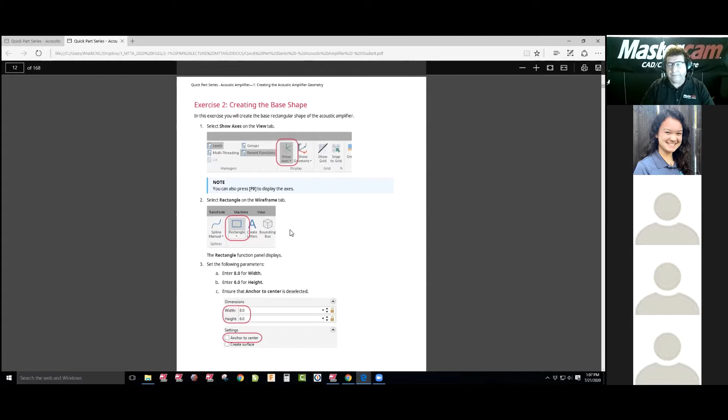Mark, hit the plus sign and increase the width of your document on your screen. Keep going, keep going. Yeah, for old guys like us. I hear you, you're just well ripened. Okay, thanks Mark, good job. Anytime, Brad. I need the feedback because I've been changing things back and forth at night when I've been looking at this.

So it's going to go ahead and show your axes and how to create a rectangle, and that's what you start with. It's an 8x6 rectangle as you start this drawing. As you can see, I have it here. So let me start a new drawing. Say no to that, don't need to save that.

And it goes into the wireframe. Again, Mastercam is teaching you to go through this whole process step by step, all the way. This is not an open file, it's create. You can create it for your students, and you can have them do the toolpath.

So we're going to go into wireframe, the wireframe tab, and choose rectangle, and we're going to set our information here. Now, real important to cover this: their anchor center — they don't want you to have an anchor center, they want you to put it in quadrant 1.

As you can see, the axes are already shown, and what they were saying in the video is that you can turn them on and off from this button here, or the hotkey, which is F9, is another one. So we're going to go to rectangle, and we're going to turn off anchor to center.

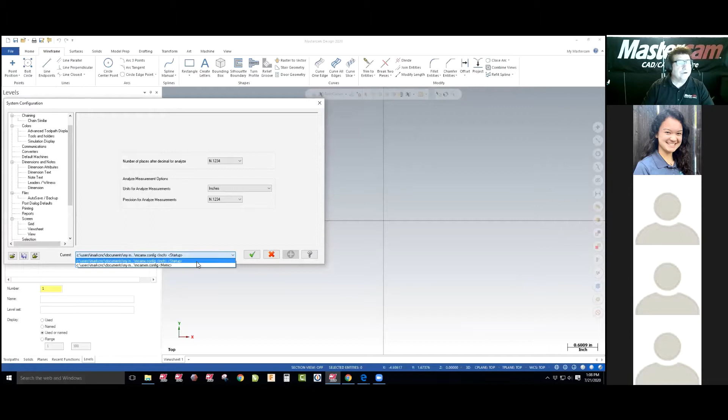And it looks like I might be still in metric. Let me go to configuration. Am I in metric? What am I in? No, I'm in standard. Okay, it just remembers the last thing I had in there — I wanted to make sure. So back, and then we'll go back to rectangles.

And then we're going to go ahead and lock these two. The width was — let's take a look — 8, and the height would be 6. So 8, tab, 6, and you can see that — oops, hit a wrong button there. 6, there we go, and I can lock it in at the origin. That's what they want us to do.

Again, from the video before, you learned to fit the screens. We have this done here. We'll go back to the video, back to the documentation — we'll fit to screen, go to isometric. So again, you can go fit to screen, isometric. Let me get this out of the way here. There we go, and we have the part here.

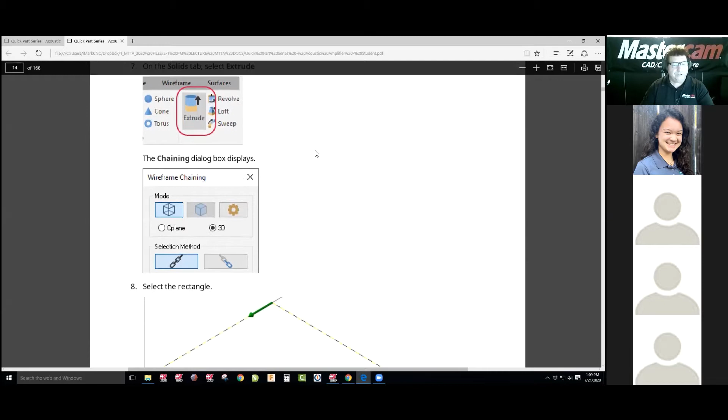Go down further, they're going to ask us to work with extrusion. So immediately you're working with 2D geometry, and now you're going to make a feature of it, and you're going to make a solid body of it. Just like any other CAD system, we create — this is not a dimension-driven program, but it's very easy to put the right dimensions in. I wish we could, but we can modify and change things by scale or changing the value of its entity.

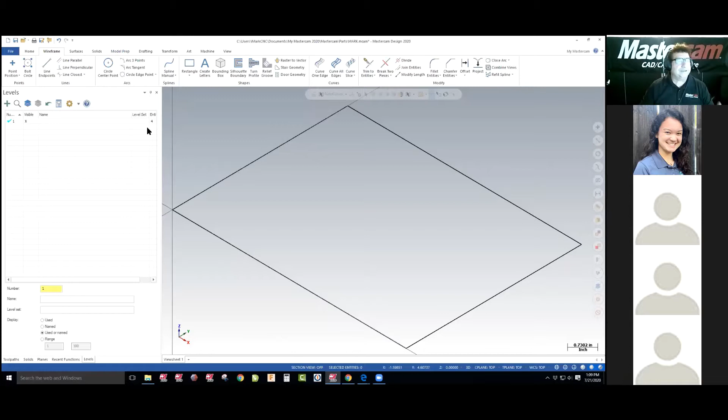So when people say Mastercam isn't parametric, well, parametric is a history. There's a little bit of history in what we have here, but it's not like it is normally when you see it on parametric software.

Okay, so we have it extruded. It's going to tell us to select the geometry, extrude a body. We're creating a body at 1.25 inches, and the direction they want us to go is up. So we're going to see the direction going the wrong way. We can also drag and move this around any way we want. We can get off there, we can reverse the direction, and we can put a value in here too as well.

Let's double check. It says 1.25 inches. I'm correct, 1.25 inches, everything's good. And now we have that information.

Now their image is solid. I can turn on translucence, if you were in my first one you would have seen that. We can put on edge curves, so the edges show, or turn those off and it's just smooth. I like to see it with edge curves, it gives me a lot of information I need, so I'll keep it solid for right now.

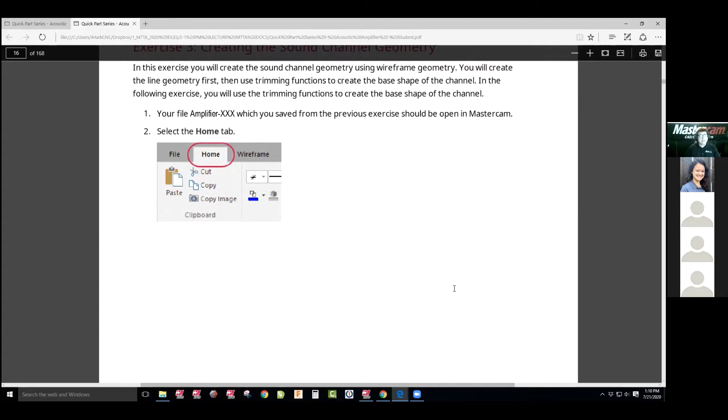Going back to the PDF, we're going to start creating some lines. This kind of made me laugh because I used to teach this way a long time ago and got out of it since I use offset so much. But there are things you'll learn in the future using this - creating a line command, doing a vertical, and placing it on the axis. So they're just drawing it anywhere here, and you can place it on the axis where you want, and that's what they're teaching you.

So in other words, they're asking you to just create a line, two points, and put an offset on the x-axis we're using, and watch it move.

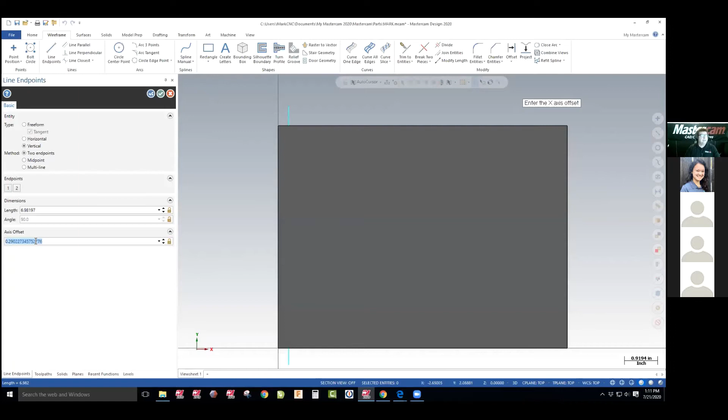Oh, I forgot one thing - you better make sure you read the information, because they want your Z above that, and they want to change your Z, your 2D - I can see it behind there. Right mouse button click, make this 2D, and we want to draw everything at the top of this plane. So they're asking us to change the Z value to 1.25, or 26 I think it was, or 25 I believe, yeah, because that's what I did.

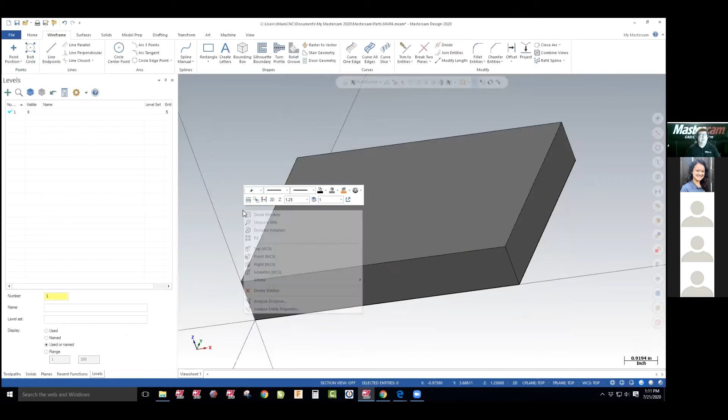Let me double check, it'll pick it up automatically. Yeah, 1.25. Okay, let me double check, see if that's what they want - 1.25, perfect, okay, everything's good there.

Let me see what else - where was... okay, now we can do the line. Back to the line, we're going to do a vertical line, any two points here, and we can place it on the axis at 1 inch. That's one way of doing stuff, I don't have a problem with that, it was kind of neat that they showed that.

Also, just to give you a hint, you can use offset at a distance of 1 inch, grab an edge that's not created, and it'll create it off that edge automatically. So they're using some techniques I used to use a long time ago that I don't use anymore, and these are just fun things you can learn.

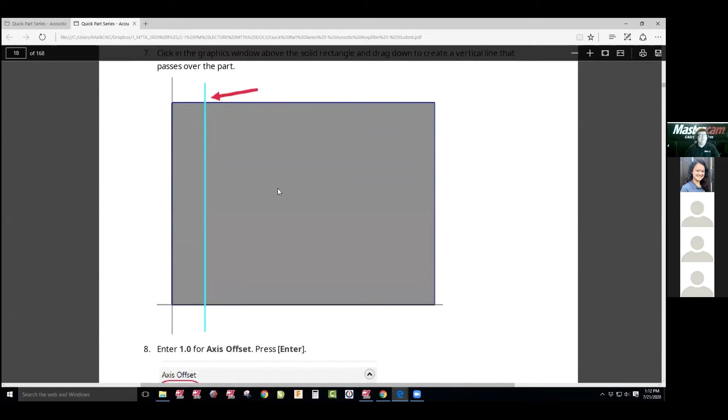So they want you to offset the next one at 3.25. Let's do another one - in other words, draw a line, not offset. They're actually just doing a vertical line anywhere you want. I can do it way out here and put in that 3.25, and it'll move it in the positive quadrant. Apply that, we'll go back here and go down.

And the next one, I think it's 4 - what is it, did they give it to me? Oh, they want to do horizontal. Let me see, I missed that one. So that one's vertical - now we change it so this distance was 1 inch from there.

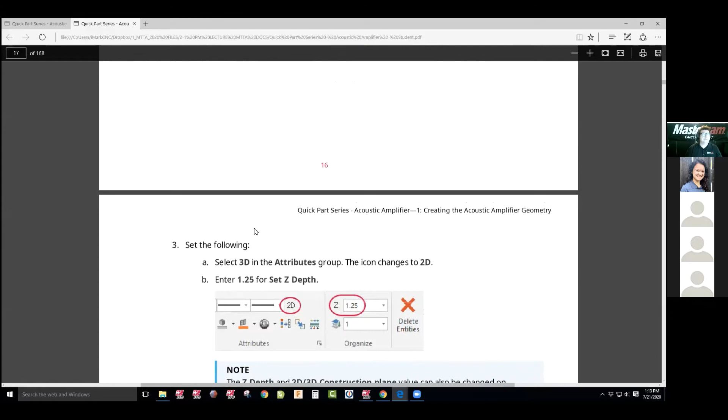I lost the distance for that vertical right there. I know it's there, okay, sorry about this - okay, here's 1 inch. The first offset is this one. This... oh there it is, right, 3 inches, so from the axis - so this one's wrong, I missed that one there.

So an easy way to fix that was just to know the dimension number. From the edge, we got that there. I'll get rid of this one here.

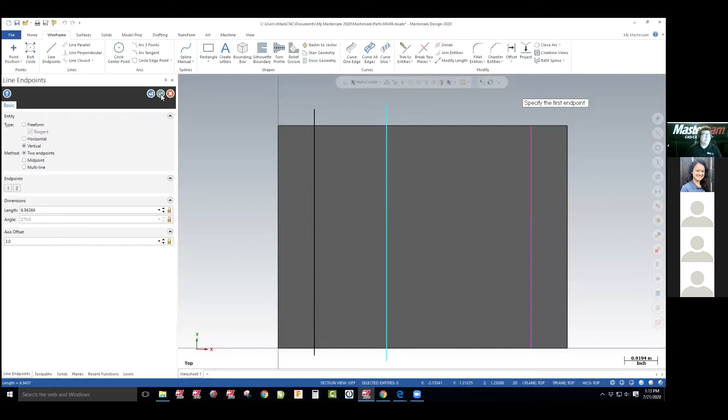And now we want to do the same thing, but with a horizontal line going across anywhere I put it. And the value of that horizontal is going to be 3.25. There's where that one is - 3.25, there's the first line.

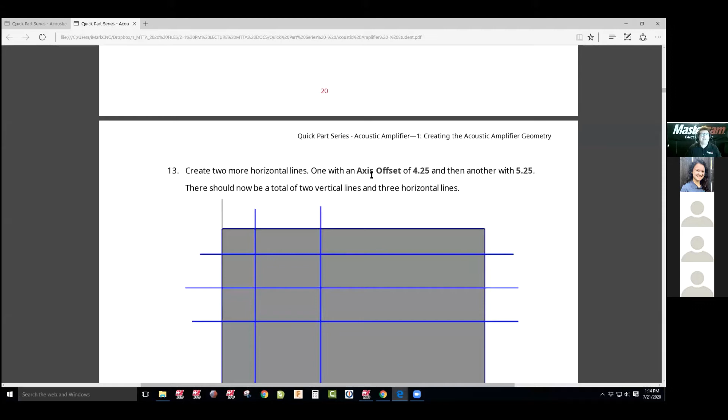Draw another one - the next line is going to be offset to, does it say - I better not go so fast - 4.25 and 5. Okay, so it's 4.25 and 5.25 in the document. So they didn't have the dialog boxes, they just have it in a sentence here, so you'll start reading these.

So if you take a look at that image there, it looks like the image I have, except there's a blue line, and I can change these to blue anytime I want. I'm used to drawing in black, so let me change that just to make it user-friendly for everybody. I don't know if that makes it better to see.

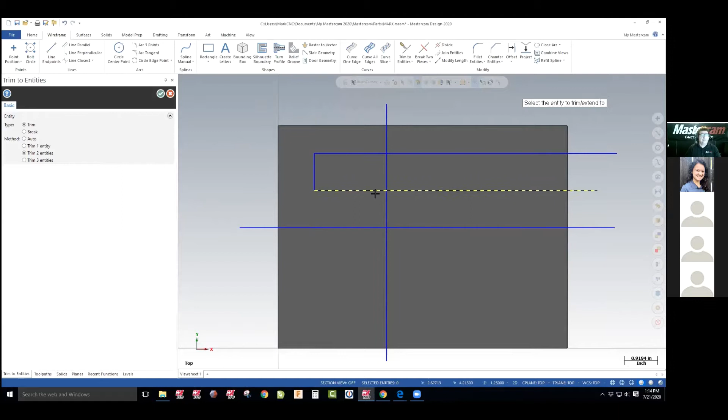And then we would do some trimming. They're taking you through trimming to clean up those entities, and we're going to use 2 entities. We have to create this. This right here was a little confusing for me, but I did trim, and I actually took this. I'm going to move it over here so I can get the images. It wants me to keep 2 entities - this one and this one, this one and this one, this one and this one, this one and this one. And we bring this back over here. That's the wrong one.

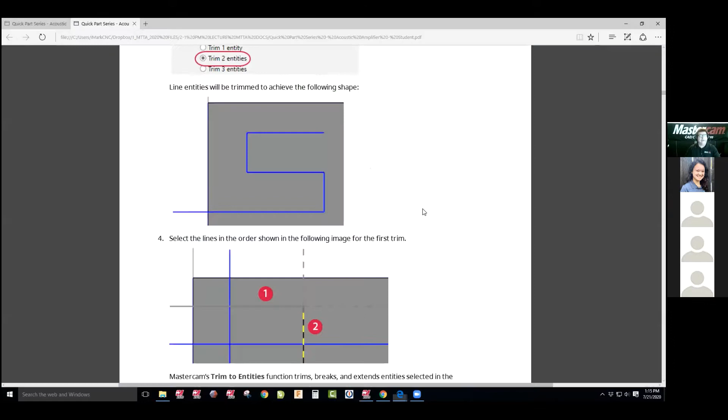Well, you can see it. I pretty much have that on my image here with that long line there. I'm not worried about that long line, and I trimmed it up. It walks you through cleaning those 2 images up. I got one more to do. It looks like I got to trim that back, so I'm going to trim this to 1. I'm going to take this and trim it back to here. Now it looks like I can actually trim this to here if I really wanted to. I guess that's what, no, they didn't do that.

But it doesn't matter. Now they want us to put circles in there because the sound has to flow smoothly. So I'm going to unlock my radius and diameter, grab the midpoint, and snap to there, then snap to there. It automatically gives me a 1 inch diameter with a 0.5 inch radius. From that point, they just taught us to do a circle, line, trim.

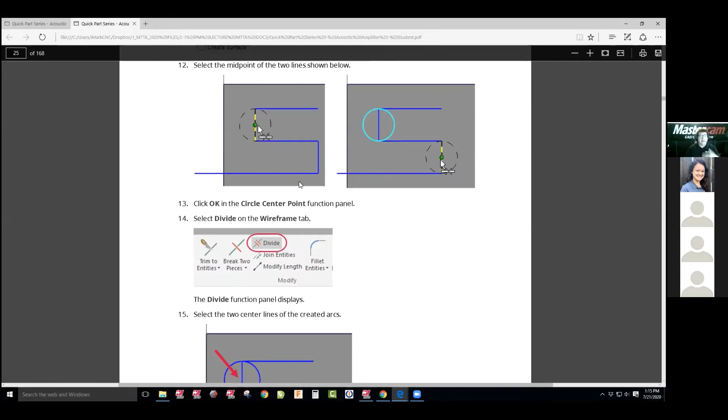And now we're going to go here and do a divide to get rid of that information so it looks smooth going around. So I'm going to go here to divide. I'll choose this to divide that, divide that, divide that, and divide that. Now I pretty much have exactly what I want.

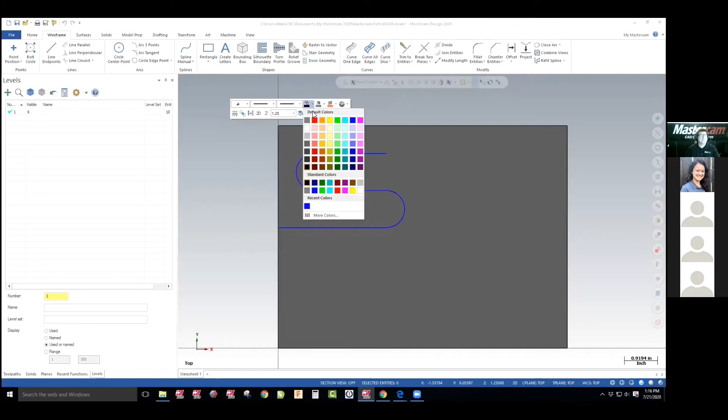Let me change these colors. I got to set my color so it stays that way. Okay, now it's set. Anything I draw now will be blue.

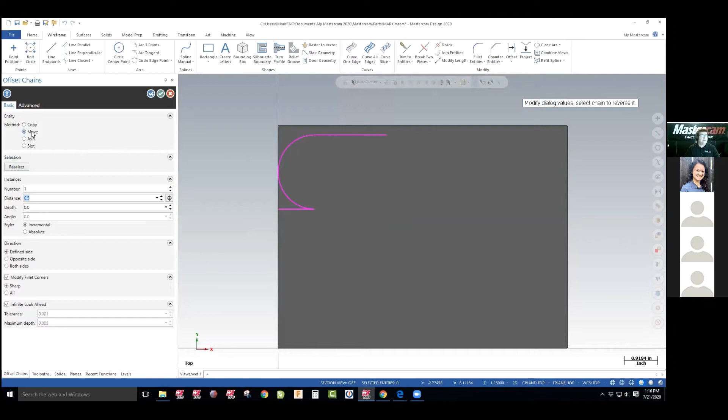And then we want to offset. Now offsetting, they're going to select it, choose that information, and we're going to move it. We're going to do a distance of a quarter inch, and it's going to go both sides, so it's going to be a half inch gap there. So let's try that. We're going to practice offset chain, select our entity, choose it, offset the direction we want, say move that direction, change the value to 0.25, and go both sides.

And there you go. So taking that information, what I really did was take out the center one by moving it. You can see that? There's magenta, and the magenta is the result, and then red's the group. So from there, I'm done.

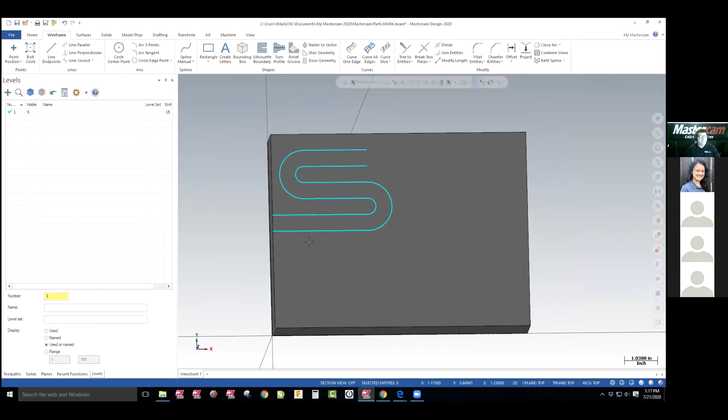Let's go back to our drawing. So we followed all those instructions. Now it wants us to clear the colors. Clear colors, and it puts it back to its geometry colors. I did change it to the, it's supposed to be that one. My eyes are getting bad here. There we go, now that's going to be the right colors.

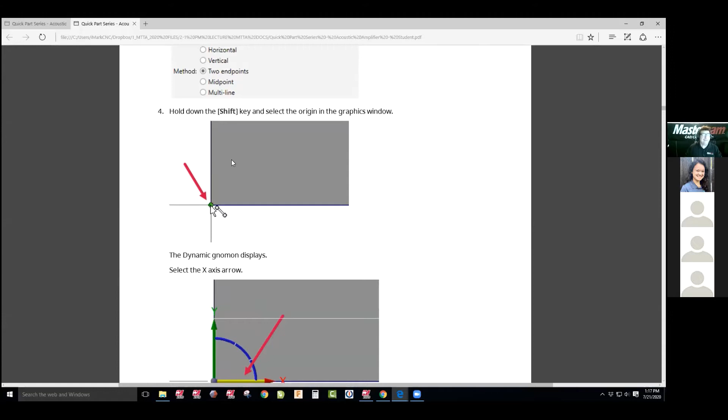Then we go back in here. We got that information, and now we're going to create some. Now I'm going to be honest with you guys - I've been using Mastercam for 30 years. This must be something new, had the hardest time with it, but never seen this. Frank, Justin, never seen this before. Maybe you guys have, but watch this.

This is crazy, don't know why they put it in there, but I'm going to do a line here, and it's got to be set to freeform. Okay, that's the important thing - freeform. Not that that makes a difference, but watch what happens. I'm going to start it here. We're used to going from point to point in freeform, but watch this. If I hold down Shift and move my mouse or click my mouse another time, this little guy comes up, and I can move this and position it where I want it to start a line. Kind of like an offset. Not bad, so I have it there.

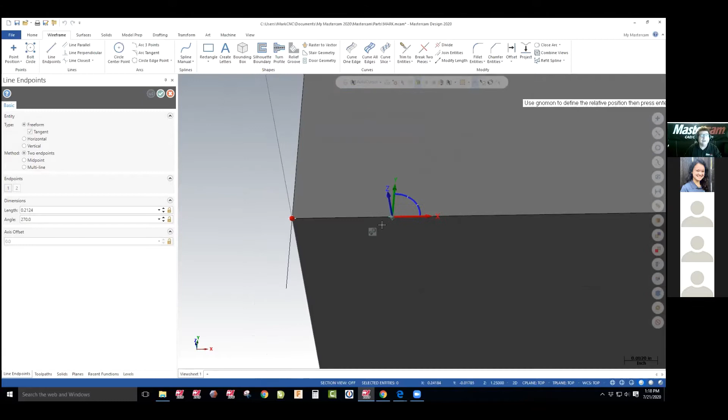So in all realities, I just created that point there. And now it tells you to go in here. Once you have that, move it over a quarter inch. It wants you to do a length and an angle of a line, so the angle was 70. I'm going to click here, back, enter that, I'm going to create the line. I'm going to create another line based off that point there - that's just a point here. I'm going to create this, let's go 7 inches at 70 degrees. So all it did by holding down Shift, it positioned a line off to there.

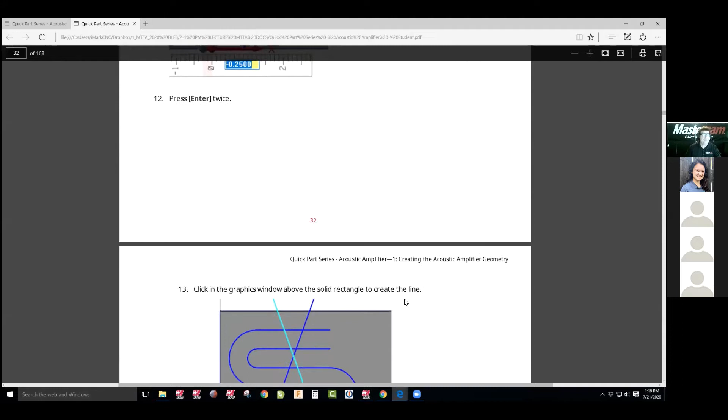I could have used offset. That's something new they're showing in this documentation which I've never known before. It's kind of cool, I'm going to figure out how to use it, but you have to click twice to get out of it.

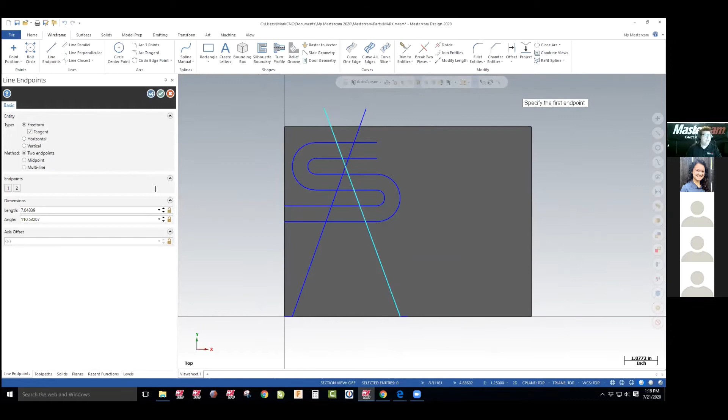Now they're asking you to grab this midpoint. Watch this - I didn't create a construction line, I'm going to go freeform. Snap to the midpoint, hold down Shift, move this, grab the bar, let me unzoom a little. There we go, we're going to go minus 0.25 now. I have that same point, hit enter twice to get rid of it, grab that end point and come up this way, and the angle is 110, I believe.

It was kind of interesting to play with that, I've never seen it before. Kind of a neat tool, but you saw how easy that was. In the past I would draw a midpoint line like that, then offset that line a quarter inch to get the same thing I just did - that's where my known point was, right there. Same end point and end point. I'm going to leave that midpoint - well, no, I'm going to have to draw it anyway later, so let me show you.

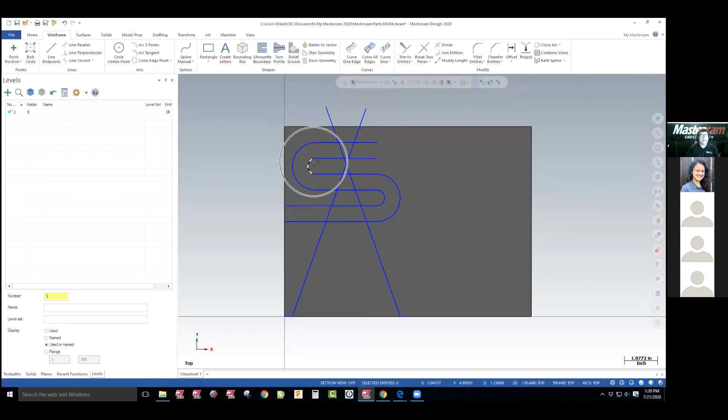We're at 120, we're doing good. Now they want us to come over and do some fillets. Remember, everything we create in CAD CAM systems are lines and arcs. So now we just created a bunch of lines, added some arcs, drew some circles and defined those by trimming them based off the tangency of the line geometry. Now we're going to take two entities and create some fillets - that's basic, every CAD system has that.

So we're going to do this one and this one, which is 0.2 of an inch. Let's take a look. Fillet, set my value to 0.2, and it's going to be this one and this one. I have that value done, apply that - I must have two entities on here. Let me check if I accidentally drew two empty entities. Nope, so let me check fillet.

Might not be on trim. Yeah, it's trim entities, that's weird, I don't know why that one didn't go. Did I touch the right one? Oh yeah, I did. I wonder if they wanted me to touch the circle. I'll just leave it like that. Looks like the nose is going to go back.

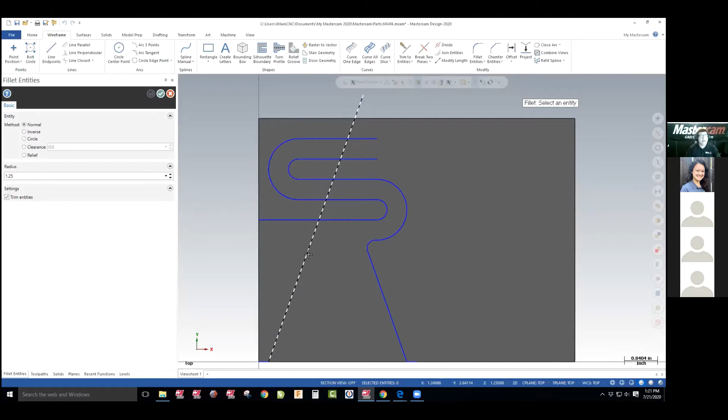And then the next one will be a 1.25 radius. Following this is kind of interesting how it flows together, and as you can see this is looking like the original shape we had here. So what page am I on? 34 - you can see we're creating this geometry just to get it, and I bet most of you already know how we're going to get it on the other side.

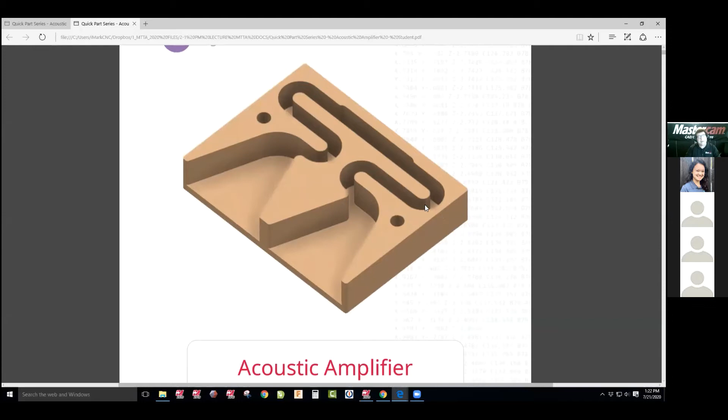We're going to make it pretty easy for us by just using a mirror. Gotta get further down. There we are, so we're right here right now - we just did that fillet, so we should just look just like that.

As we go on, now we're going to create some lines vertical. There's that midpoint line, we're going to use that for a mirror line. As we come in here, we're going to grab the midpoint - I can just grab that point there, move it up, check. And now we're going to do mirror.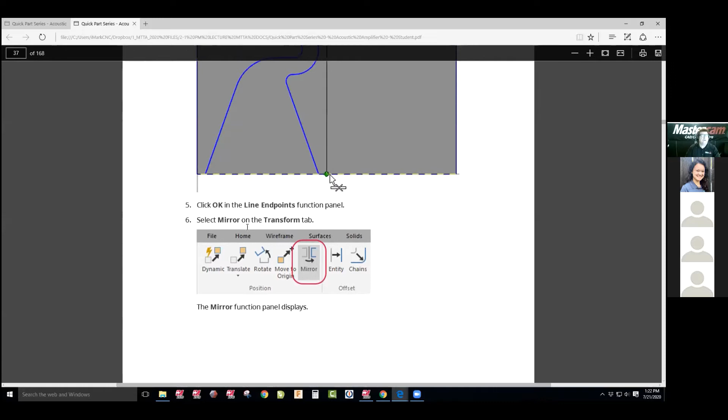Now here's what's kind of neat - it says click OK, mirror transform. Select mirror transform, but where's transform? Oh, I got to go to transform and then find mirror. All I need to do is hold down shift if I wanted to. Well, I'm going to get rid of that one and that one, unselect that. And it populates in my tool wireframe selection, and it knows I want to mirror it.

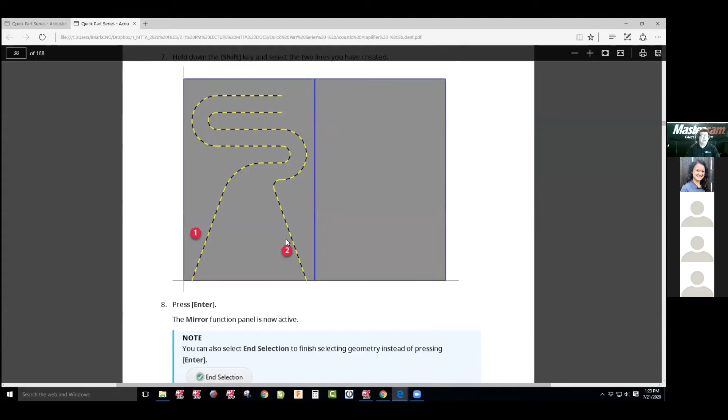And it tells me, what do I really want to mirror it about? And it will be a vector. So they're telling us to choose a vector to mirror this about, and that would be this one. Alt tab, go further down. And then now they want us to trim, again learn to trim this line up to here, so repeat the process on the 3 lines so we have them.

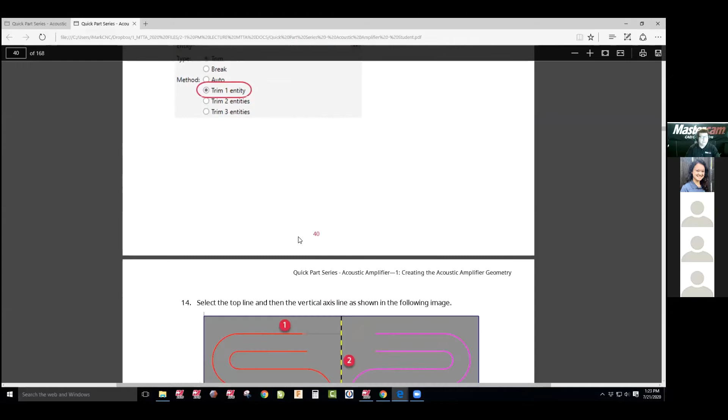Trim, one entity. We're going to come over here, clear colors if we want, and go to trim, one entity. We'll take this one to here, one to here, one to here, and one to here. This actually bothers me because I would rather join it, but I'm following their documentation.

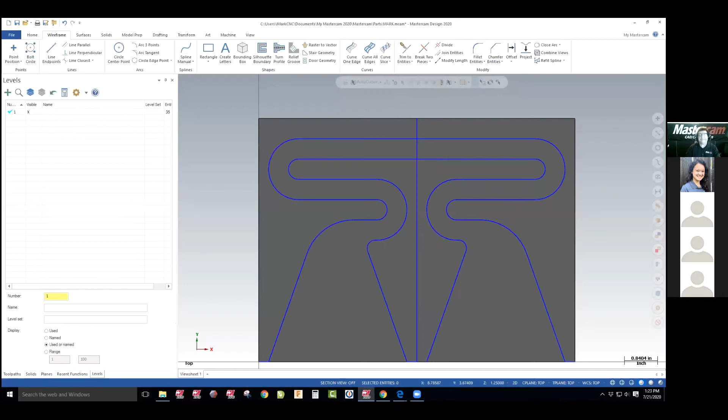I like single lines, I don't like an extra endpoint, but I can't do anything about it. So they want us to go to isometric to take a look at it. We choose our right mouse button click to go to that view, and now we have pretty much that geometry.

Looks like we need a couple more pieces of information as we come down. We need to create a horizontal line and close this off because we're not doing a thin wall extrusion. I don't need these little lines right here. I don't know if it tells you to take them out or not, but I'll take them out.

Horizontal here. Yeah, to there. Did it draw it? Yep, here to here, done. And I must have mirrored that little guy over there, which I didn't know. Delete that. So as you can see, everything I've been drawing right now has been from Z0 right here.

To the top here is 1 1/4. So everything we've been drawing has always been up from the top. So if I change that to zero, everything I draw now—we can control this and teach students that it is at the bottom. And as you can see, it's at the bottom now. That's good information to teach your students.

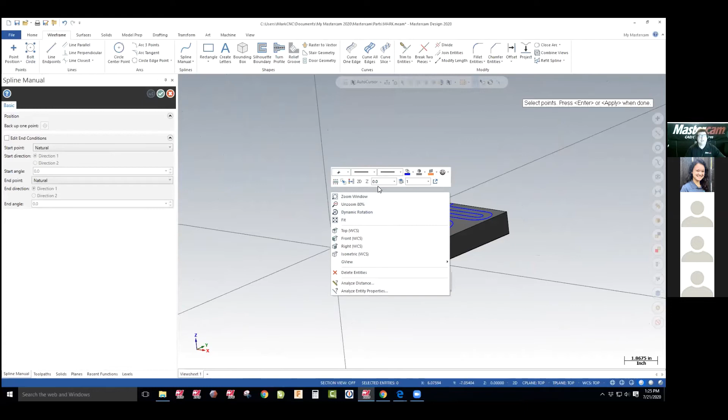Now I'm going to do the same thing. Make sure I'm on 2D, and I'm going to trace this. And look where it drew it—exactly where my 2D information is, even though I used it as a trace.

So the next one, it looks like we have to cut this, and we're going to cut to there. So we're going to do an extrusion of 1 inch. The students already learned how to do an extrusion. Now we're going to do a subtraction from it and actually cut.

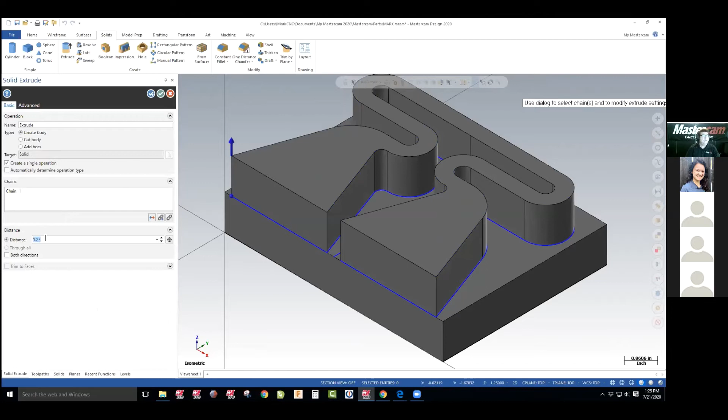We'll select all that, check, and you can see that this information is going up. If I come in here and set my value to 1.0, it's smaller, and if I tell it to cut, it's not going to show anything because right now my cut direction is this way. I just have to reverse it, and now we have the part finished.

Okay, looks like it's good. Now we've got to build the part. We'll go to the top plane. We need to build some holes, and the holes are going to be 504 thousandths.

So we'll go to the top—right, okay, we're going to go to the top plane, and again we're drawing on that top. So I'm going to use that corner to create a circle, lock that value in at 0.504, zoom in on this, and place it here.

Now, this documentation is telling us where to do this. I would actually have a drawing with blueprints, give that to the students, and have them create that, because now we're going to have to know where to move it. A lot of students think, wow, how did he know to move it there? Well, because he just designed it there.

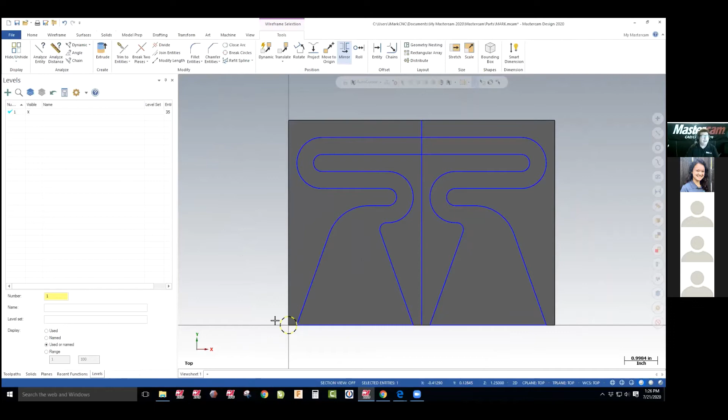So he's going to translate that circle by a value and move it 0.75 on the X and 3.25 on the Y. So we'll take that, go to translate, 0.75 on the X, and 3.25 on the Y, right here. And it moved it up there. We want to move it, and it's there.

How do we get it to the other side? Again, they go to mirror from a vector and move it over there. Now, oops, I didn't hit the right vector—hit a point, and there it is. So that's what they're going to be telling us to do, is to mirror it over. And when you're done, you have it on both sides.

And it looks like we've got to cut it through a distance of a half inch. So we already know where to go: solids, extrude, select, change our view, zoom in on it a little bit, and we check—and you can see it's already cutting.

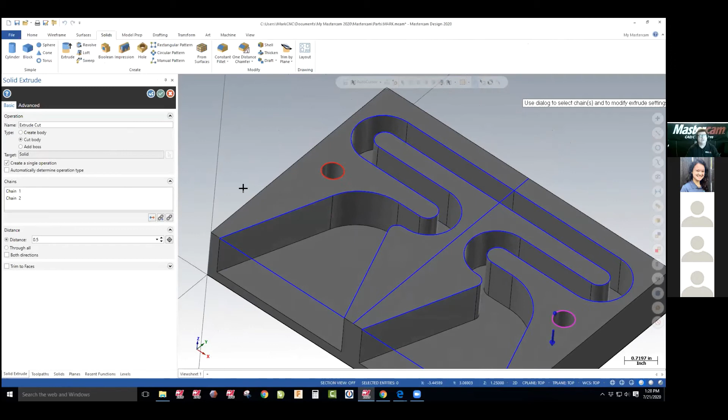And it remembers the last cut we did, but we want to only go 0.5. This most likely will be for dowel alignments of the two pieces of wood. They want a little oversize on it. You can see that.

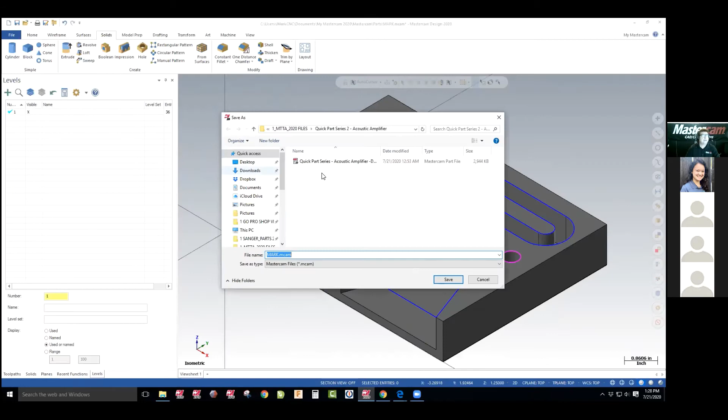So how are we doing? We're doing good with time—yes, 28. So we'll go further down here. That's what we have. They want us to save the file. I should save it because it would be terrible if it crashes. File, save as, Quick Part acoustic, and I'll call this Mark. That'll be perfect.

Just to be safe, now we'll go further, and now we're going to go to the top plane, and we're going to delete some entities, which would be this one right here. Any of the extra deleted stuff. Now it looks like we're going to do a rectangular shape.

That's an obround, and we're going to use this information for where our phone sits. So this is the information, this is the value. So this is a new command because we use rectangle. This is called rectangular shapes. Rectangular shapes is an outstanding

command. I use it all the time because I can do obrounds, which you can see the image of it there. I can do the single D, the double D, the base, and 2 points if I want.

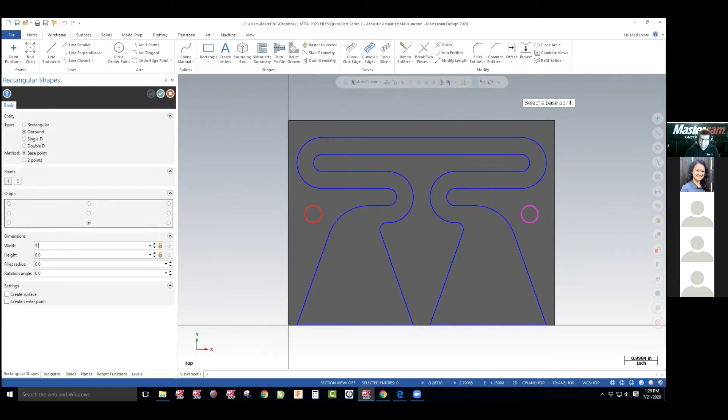So they're asking for an obround at the base. That means I'm going to lock it in here, and they gave me a value of 3.75. 3.75 here. I guess that's the phone width, and the height is going to be 0.6. Now, this could be modified anytime you need to for the size of your phone.

Oops, I need to lock those in. Locking in is so important. 3.75. And nope, 3.75. There we go. And now I can locate it here. And if I accidentally pushed it somewhere one time, I can always select it and delete it.

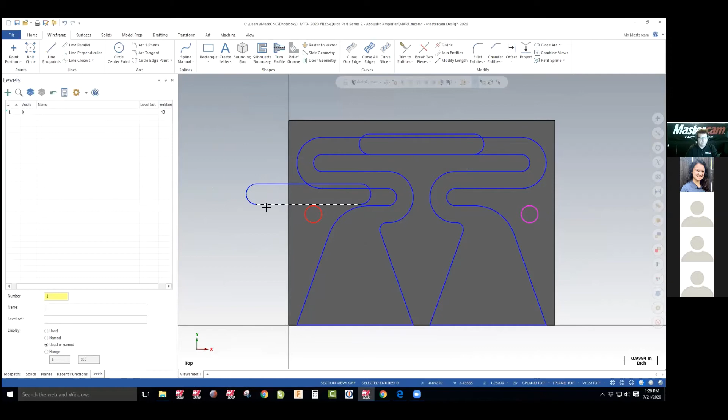So there's that other cut we have to do. Let's take a look at the cut. So we already know how to do solid extrude cut. So it looks like we're going to do it again. What we really need to know is the distance. Oh, we're going all the way through. So we're going to make a hole all the way through this.

So we're going to go to solids, extrude, select our chain. You can see right now it's set, not going far enough. Now I can also go through all and not have to put the value in there, and it automatically drops it through. So either way, you start learning to read these distances and control, just like SolidWorks and all the other softwares out there, and we'll select that.

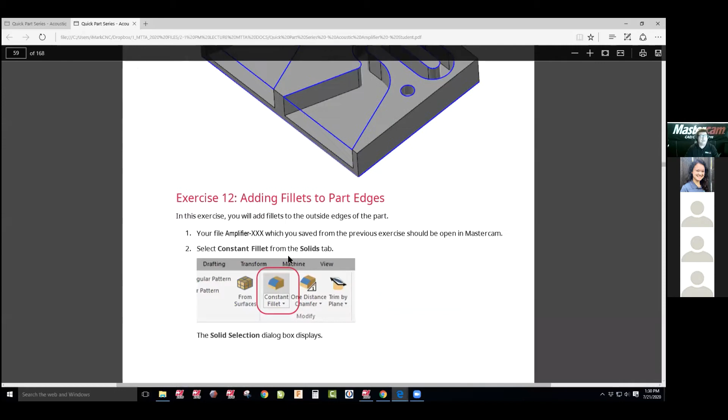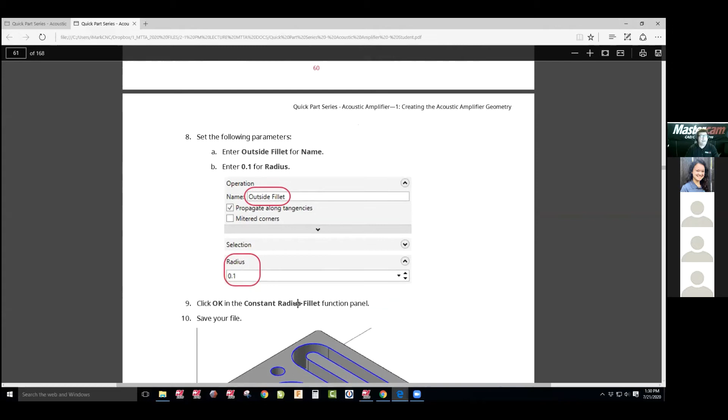So it looks like we got that first operation done. Now they want to add some fillets, and the fillets are going to be on the corners of the box on the outside, and the distance will be 0.1 radius, just to soften these edges up.

Man, if you ever stubbed your foot on one of those sharp pieces of wood, it hurts, but it's nice to teach this. So I'm going to grab this edge point, edge, and put in a value of 0.1. You can see it softened it up.

Looks like I have 2D geometry down there. I probably do, it's the one I extruded. That's what I'm seeing, I can take those off. So we have that done. Looks right, I think we're almost ready for machining here.

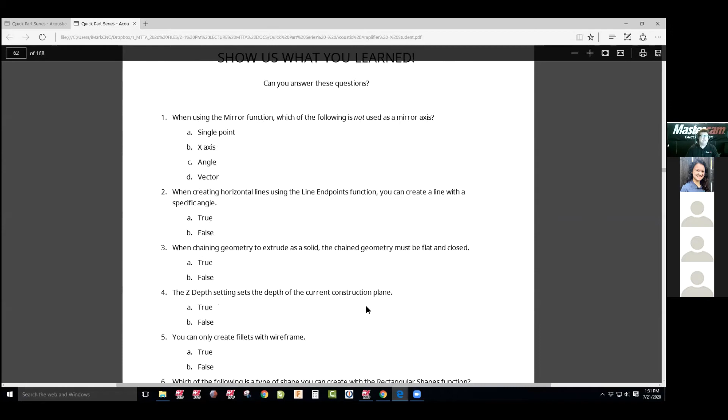We're going to go to Fit Screen. We're going to do Toolpath, and we're going to start the toolpathing. Good timing, I think I might make this one. So at this point, we want to remove that material. We're going to use some hybrid toolpaths, dynamic toolpaths.

Forgot to change my shirt. I had a 'be dynamic' shirt. I was going to put that on this time, and I forgot to change it.

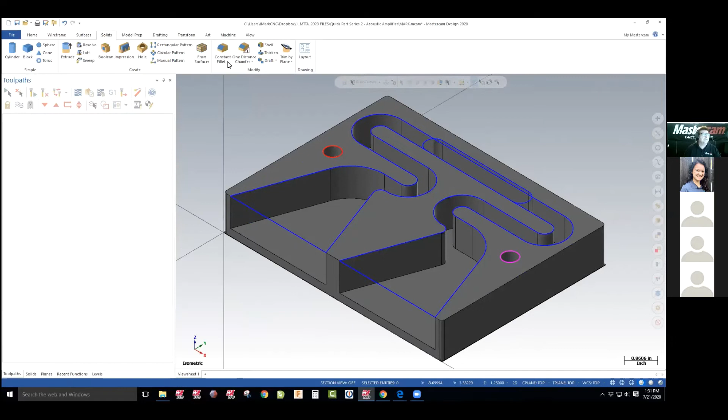So we'll go to Toolpath. This time I'm going to use a router. Undock my deals accidentally with my mouse, move that over. Toolpath, machine, this time we'll use a router. Since we're in a router, I'm going to use a Techno brand.

And Alt-Tab, and it's telling us the size of the material that we want to do. And as you can see the X is way longer than the normal 8 inches that it was, because they're planning on machining more, like the top and the bottom. So that's what he's setting up, and I got to remember that. So the origin will be at the lower left corner here.

And the Y will be 8 inches, because remember we did that 6. This will be 24, and 1.25. I don't know why he has 1.26, that's a questionable deal, and that's how he machined it.

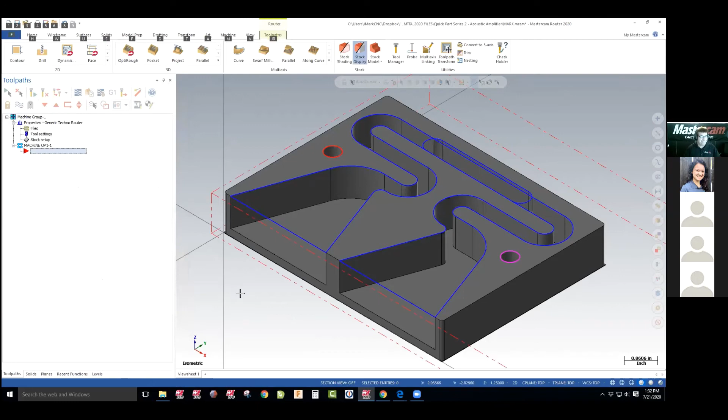And then he has an offset for your stock origin just to move it over, which is a minus 2.0, and on the Y, minus 0.25. Now, all it's doing is shifting the material over here, so your part's flipped in here. This is a, let me turn it on. Sorry about that, this is a bit difficult. I'm going to have to question this just to let you know I don't machine that way. I actually have my part floating in the material.

You just got to remember, if you put your origin here, it's going to think that's the origin. So you have to jog your origin into the material and then call it your origin. That's very important, kind of confusing to a lot of students.

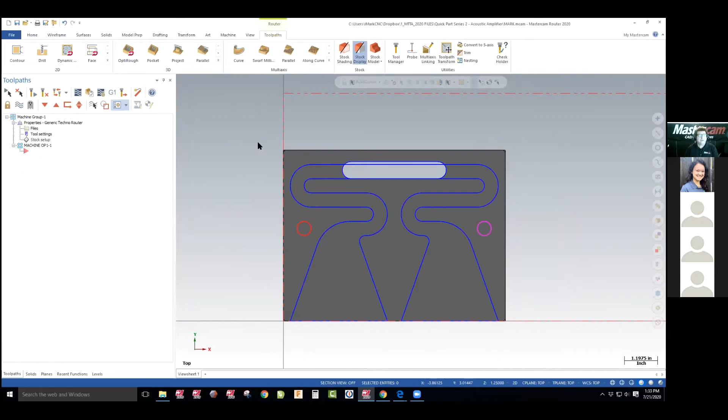Let me save this real quick. This is what I do, as I use my material as my origin, and I don't have a problem because I put this at 0 just to show you so you won't be confused. I take this, I'll translate that the same way. I would go 0.2 on the X and then 0.25 on the Y. And now my part is floating in my material.

So when I set up my machine, I just find the corner of my material. Control Z will get that back to where it was. But that's what they're requesting to do here on this documentation, minus 2.0. Maybe woodworkers do that, but I've never worked with that. I nested inside - I call it the Michelangelo approach, where Michelangelo would carve out David in a marble, and he would never keep his material up to the side, or have a flat arm or anything like that.

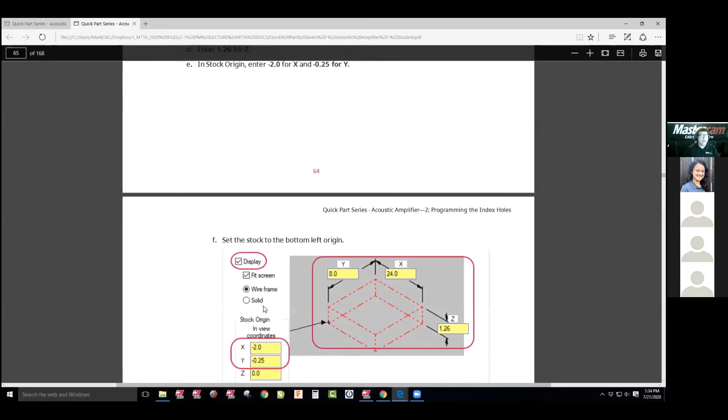So we're ready to continue on. We got the part, you can see that looks just like that. There it is, and it's sitting there. Looks like he did more than... oh, he did -2 inches. Did he do a -2 inches? Why such a waste? I'm not going to worry about that - that's awfully big.

Circle mill. So we're going to go into the toolpath. The first toolpath they're going to do is remove the dowel information, and so they want to focus on this. In fact, I'm going to just show the solids and show you how we machine solids. We're going to go into toolpath.

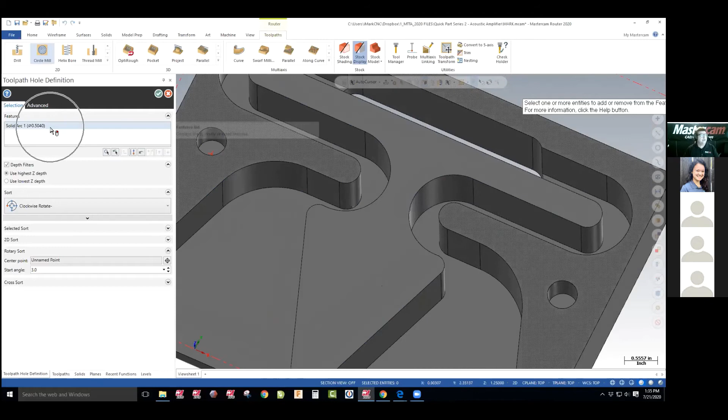Choose all the different 2D routing toolpaths, which is circle mill. And circle mill is one of the greatest toolpaths for doing circles. I'm going to go into toolpaths, and I'm going to choose the depth that it's set to, so it sets the diameter and the depth for me.

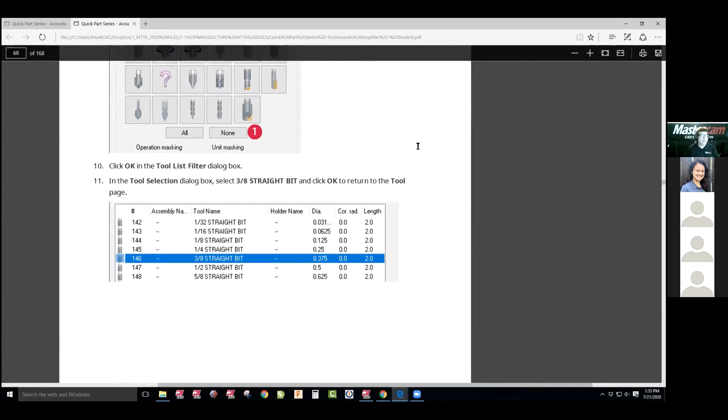Now my job is just to get the tool, and the tools they're using on this one are flat end mills, 3/8 inch straight bit. So they're using a 3/8. I personally only use a 1/4 on my router bits. You guys can filter this out, choose what you want. It's already defined out.

On routers, it's better to cut with a smaller diameter tool than a larger diameter tool, depending on how weak your gantry is and stuff. But that's what I stay with, and it's just like cutting with a table saw.

Here's your feeds and speeds they want you to set to, so you can change those anytime you want here. Okay, I'm not going to go ahead and set those. Continue on - cutter compensation right. They want us to go down to cut parameters and make this right.

Then they do not want us to have any wall or floor material, so we put these to 0. It's important to really look at that document that they're showing here, because they're going to highlight it with circles. Right now we're in the parameters - right here, the cut parameters. So we went to cut parameters.

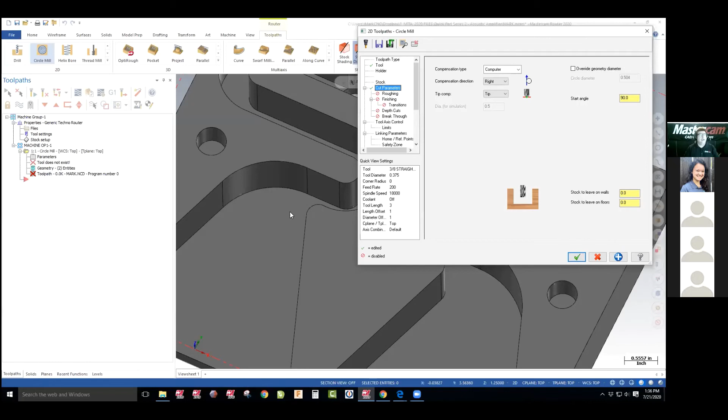We saw this cutter compensation - the word says compensation direction, and it says right, cutter direction right. And we answer the stock and wall, and it's 0. We just follow that information, and we should be able to get what they want.

They want us to have a finish, so we want to hit the finish button, turn it on, and it's going to be the second one. They want us about a 2 thou - I'll leave it at 5 thou, it won't make any difference. And then the retract heights.

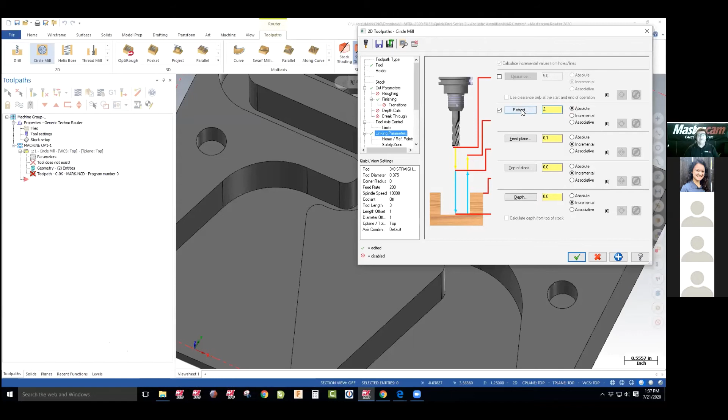These are important because now we're into the linking parameters, and it's going to walk you through it. It says linking parameters, set the retract plane to 2 inches. You can discuss what does that mean, 2 inches? Well, our top of our material right here - let me go ahead here, retract. Top of the material right at this part, from the bottom up, is 1.25 inches.

Well, we don't want to retract 1.25 inches, we want to clear that. So we're going to go absolute 2 inches above, so we're about 3/4 inch above it at all times. Looking at the document, it says your feed plane is 1.4. So they wanted absolute, we want 1 inch 0.4 - that's just barely above there, so it's going to wrap it down to that point.

And what is the top of stock? Well, 1.25. And where we're going to machine it to - that makes a difference. So let's take a look where it says.

It comes in here and says incremental, so I'll leave it at that default. If you touch the bottom circle and not the top, you'll be okay, but if you touch the top circle, it won't cut anything. It depends on where you're doing it, and that needs to be emphasized to students, because they'll touch the top one and not get the toolpath they want. Now that dropped in there right away. I must have missed the roughing - yeah, turn on the roughing.

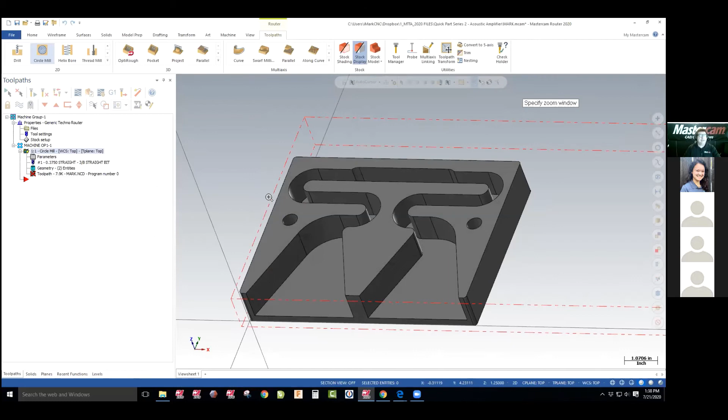So roughing right here, 50%, I'm just leaving the defaults. You can see that one went all the way in without the roughing, which was kind of cool to see. But if you re-select it, you'll see a ramp going all the way in to its finish, leaving about 5 thou. So we can actually visualize this.

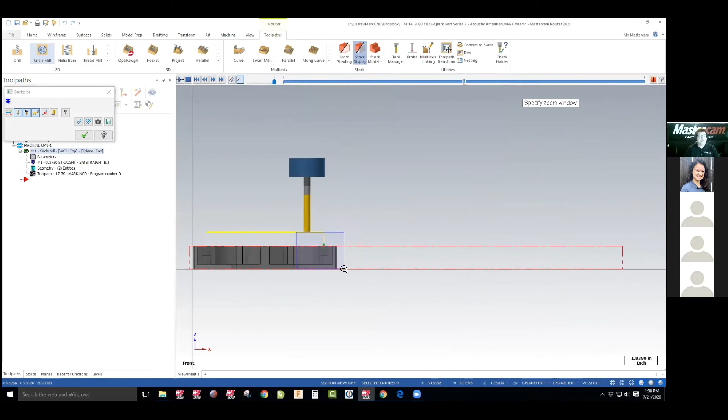We make it translucent so we can see the tool go in there. We'll run it and go to the front view, and you can see it come in. Back off, that's a little faster than me. You can see the tool goes to that depth incrementally, as I selected.

So let's go on - oh gosh, 2 minutes. Okay, we got that done. Let's do the main cut part. I'm not going to backplot it, so we won't do the multi-view there. We'll come down and get to the dynamic 2D toolpath. This is what we want to get into right here. We'll come back to 2D dynamic.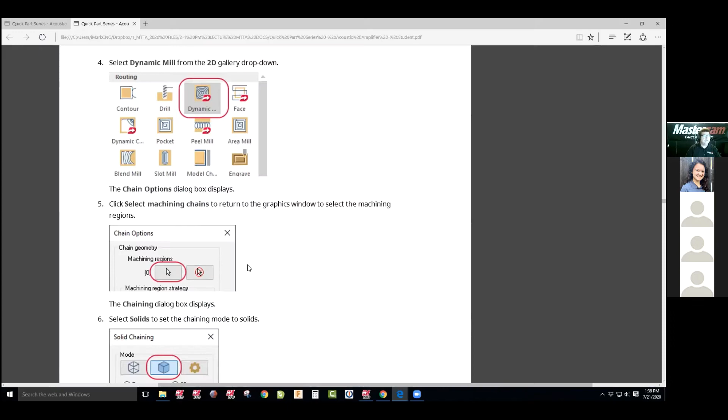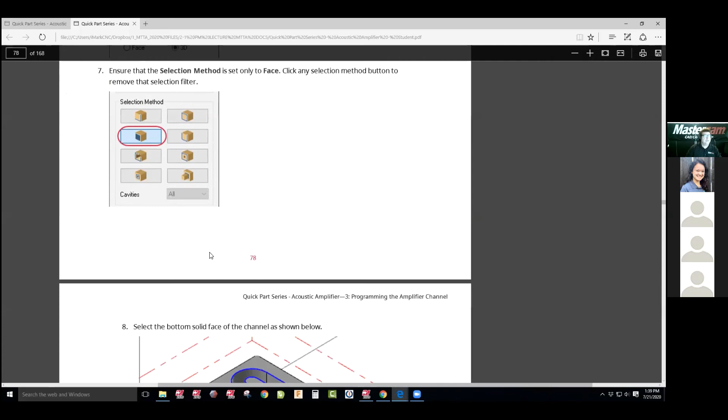It's going to ask us what we want to machine. We want to machine this, and I believe it's the other one too. Oh no, we're going to do solid face - let me kill that real quick, clear that out. No, that's right, let me see here, hold on. So for machining, select 3D, we want the face - that's what I thought, this one here. Unselect that, and we got that and this. So I believe they want both faces. There it is, and we're going to go from the outside when we're done here.

They want us to go from the outside. Now I can preview this, but before we do that we want to do an avoidance, and what we want is the top, so we need to avoid the tool. This is the thing you need to learn: I want to remove this, this is my machinery, and I want to avoid all this, but keep the tool in a constant tool engagement - my machine, whether I was just cutting on the edge, would sound the same. It would be perfect.

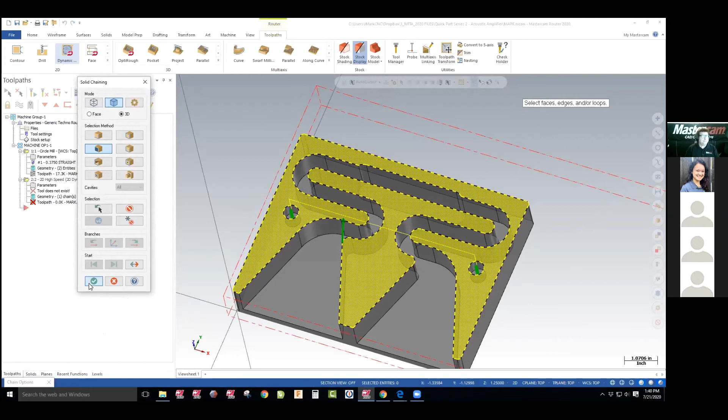So we can preview it - the red is what we're going to machine, and that's exactly what we want to machine here. Check the tool - again it will probably be the 3/8, I believe. Did it say the tool? The tool is a 3/8 straight, so we'll use a 3/8 straight again. Answer this question, it tells you it will pop up.

In here, under the parameters, again we're looking at feeds and speeds - not going to worry about it. They're asking us to leave nothing on the wall but have a back feed of 300. If your machine can handle it - my machine only handles 200 at the very max of its speed, so it will just only do that. So the feed calculations may be off a little bit.

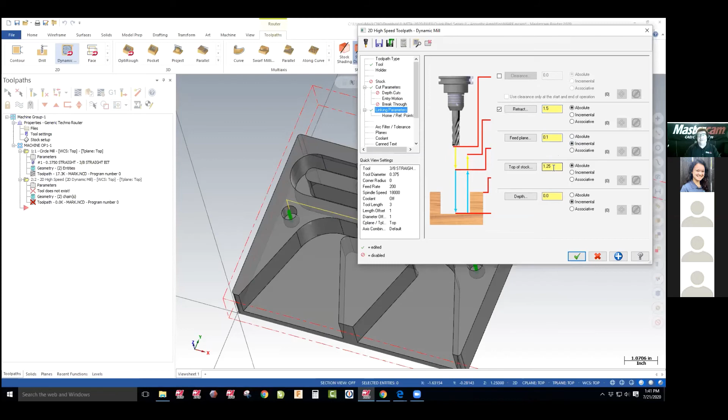Link parameters, again the whole concept - let's look at the link parameters. The retract, we've got to go greater than 1.25 inches, so I can go 1.5, that'll be the safe number. The top is the feed plane - I usually use incremental because it's based off the top here, and I'll leave incremental here. But they have a different value, and you'll see once you understand these tools and how they work, there's a lot of different ways of using it.

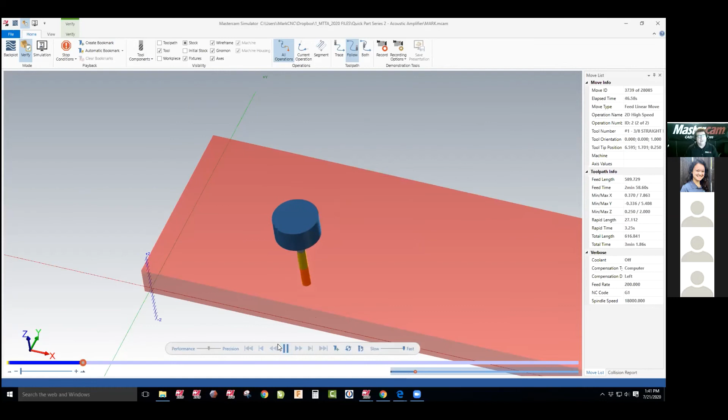This toolpath is just amazing. Now we can take a look at this. What's nice about this toolpath is you're able to run it, and the tool is not burying itself at any point. It's keeping it pretty easy. I know I'm going a little fast, so let me slow this down just a little bit, rewind it, and run it so you can see it. This tool is a constant tool engagement.

I didn't set the value - that's the radial engagement, I can tell it a percentage, like 'I want you to go 11% at all times.' So if I have a weaker machine, a small desktop unit, I don't want to aggressively hit this - I may want to control it axially, the depth of cuts. You have total control of this in the parameters.

Now this is where I can go a little bit further. We've got 9 minutes, so I can control the depth of cuts. I can say, hey, I want each depth to be 1/8 of an inch because my machine isn't that strong, and on the final depth I'll do about 10 thou. So it's going to change the toolpath so it only goes down 1/8 at a time. Let's put 1/4 for time's sake.

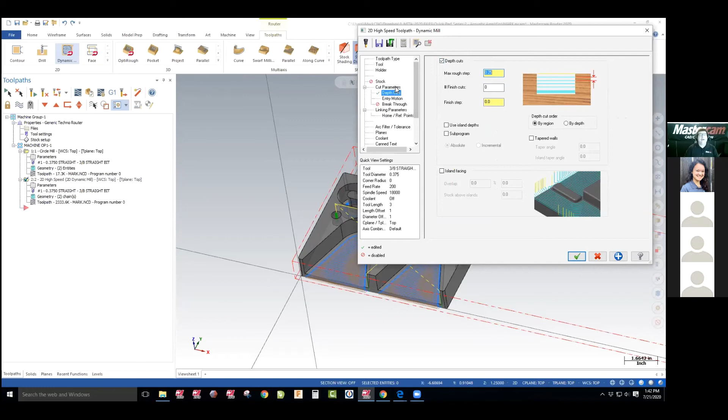And so I'm going to control that now. The cut parameters, here's your step over. This is 3/8, which is a big bite, so I want to go 15%. Now I just controlled it down to 15% of the bit, so there's going to be less tool radial engagement and less axial engagement if your machine isn't strong enough. So you have total control, and you'll see it takes a little bit more while to generate.

There's so much you can teach your students with this. Sorry, my computer's not super fast.

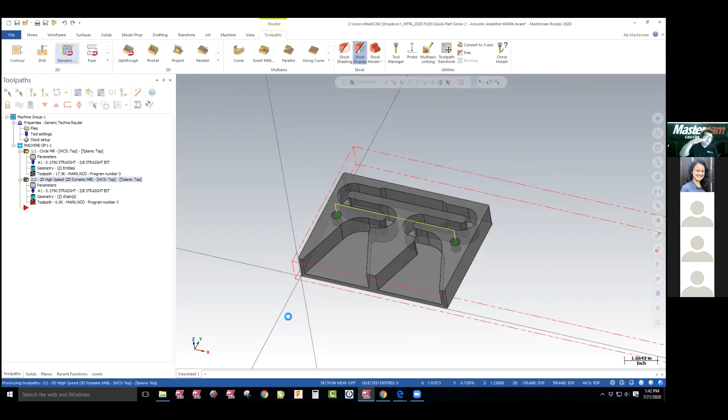Because remember, I'm adding it, there's like 10 passes. How many would it be at a quarter? Yeah, it's 4 passes. Okay, so each one of those you control by just changing those values. I think you guys will have this recording, you can see that I controlled that through just settings in my parameters. Let it generate.

And if I was to really do this, I would have filtered out the toolpath. You can see how crazy filtering out changes the toolpath.

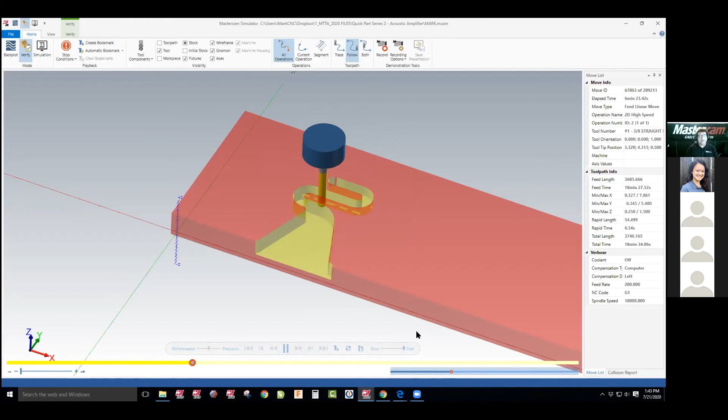So you can see now I'm controlling depth of cuts. Let's speed this up, there's one depth. Some machines will not be strong enough, but this will work out perfect. So I control the axial and radial, my engagement on my radial smaller and my axial smaller rather than doing full depth of cut. We saw in the video doing full depth of cut because they had a robust tool there. So they want one more.

I believe we got to do the slot now. What time do we have? Let me see what I have over here. We've got like 6 minutes. Any questions? Does anybody have any questions?

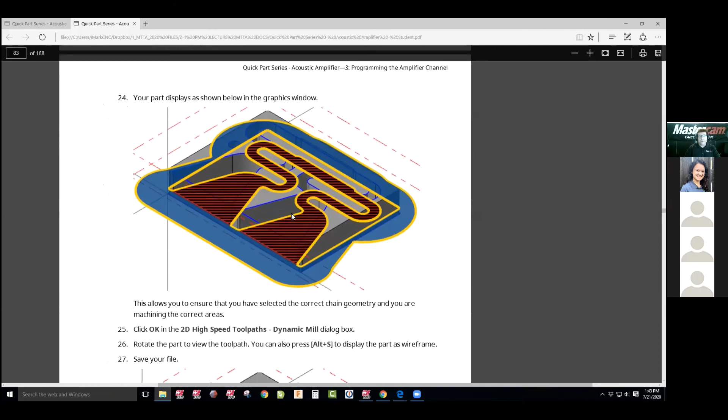I know this is going fast, but this is the series that you can walk through and practice with. So they're just asking us probably to move one over. We got the toolpath, they want us to do the slot. That's an easy contour slot cut.

And as I go through, I have a question. Can the students do this at home? Is it like a PDF that they're working through? Yeah, Frank, you want to get that?

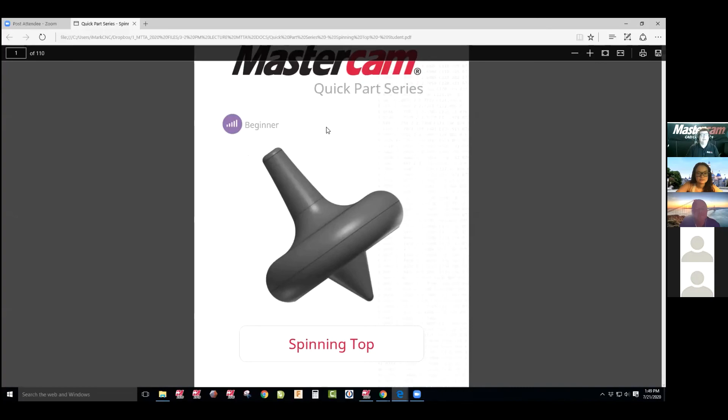The next one we're going to do is MasterCam's signature part, the lathe. It's a top, and lathe is always fun for teachers. This is one of the things that's lacking - in fact, my YouTube videos have 16,000 views because of lathe. There's not a lot of lathe people out there, and I just love lathe. In fact, you can see this was done many years back at MTT - not MTTA, can't think of the acronym right now - back in Chicago I did this for them, and it's all a lathe part. This is a lathe part on my handle that we use, and we press fit these. So lathe is really a neat process.

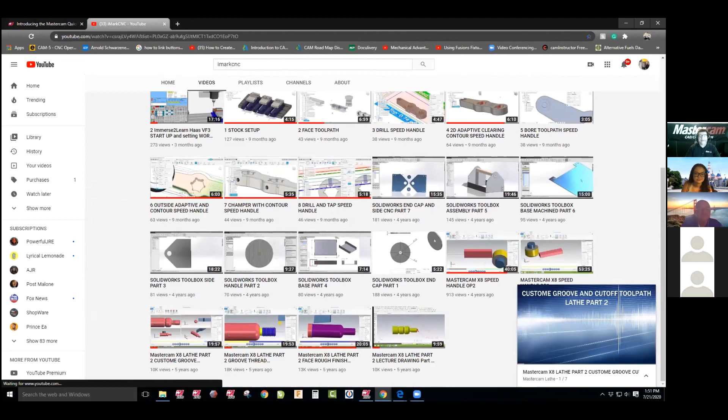I'll have some videos like how to set up a Haas on Immerse2Learn. This is Fusion work, this is MasterCam. So the next class, as you can see, my lathe work gets 10,000 views. There's a hunger for lathe out there in education, and when you look at this it's just like wow. If I show my SolidWorks work, not a lot of views for that information, but it just seems like lathe - people are hungry for lathe in education. I think we might have to pick those up - not a lot for Fusion yet, I got 273 there, but when you come down to lathe: 18K, 13K, 10K, 10K. Look at just normal - where's my normal MasterCam ones? Over here, my speed handle - no, that's... where's my... here, down here - 900 views, these are my MasterCam ones. So there's not a lot of views, people really want to learn about lathe. That's why I'm glad they're doing a signature series on lathe - I'm actually pretty happy that they're doing that.